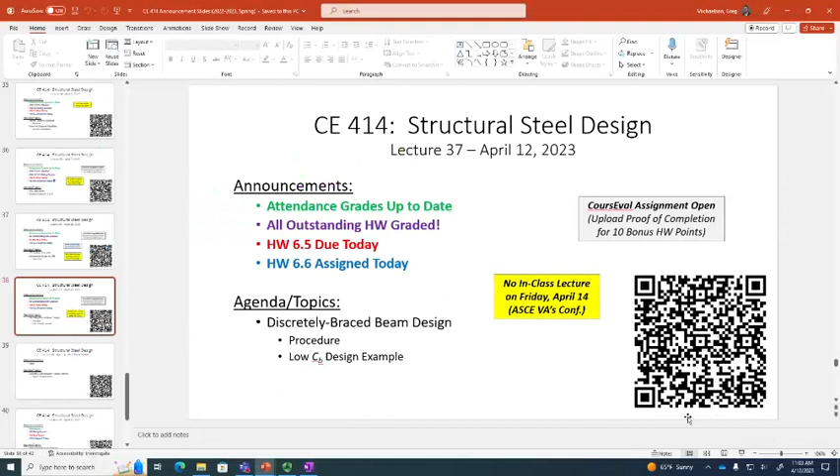So today, what we're going to do is discuss design of discretely braced beams. The process is generally the same, except for the step where you actually pick your trial shape. In the past, for continuously braced beams, our tool for selecting the shape was table 3.2. Now the tool is table 3.10. So it's the same process, just a different selection strategy. We're going to do an example problem today, and you'll see how it is remarkably similar to what we have done before, except for that stuff in the middle.

Now, our example today is what I'm calling a low CB value example, okay? So we have a low CB value example and we have a high CB value example. The difference between the two, those terms are my own terms, my adjectives for the examples. But what defines the difference will become clear as you get into the examples. Basically, high CB values cause you to iterate your selections a little more than with low CB values.

So let's make sure that we're clear on the equations for capacity. We have zone 1, zone 2, and zone 3. One thing I will tell you, and I think I mentioned this in the pre-recorded video, if you are given a beam and you need to analyze it, it could be either zone 1, zone 2, or zone 3. You really don't know until you go through the math and see. But I will tell you that in the land of design, when you as the engineer are responsible for selecting optimal economic shapes, you will most likely be in zone 2. That will most likely be where you land if you're in design mode of discretely braced beams.

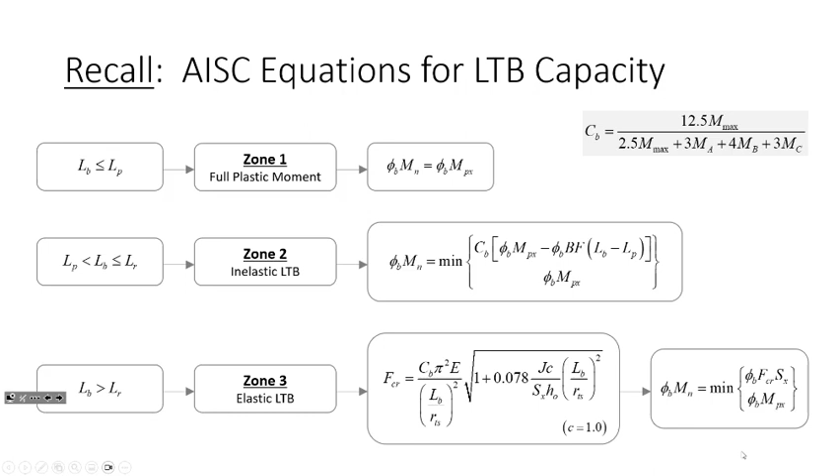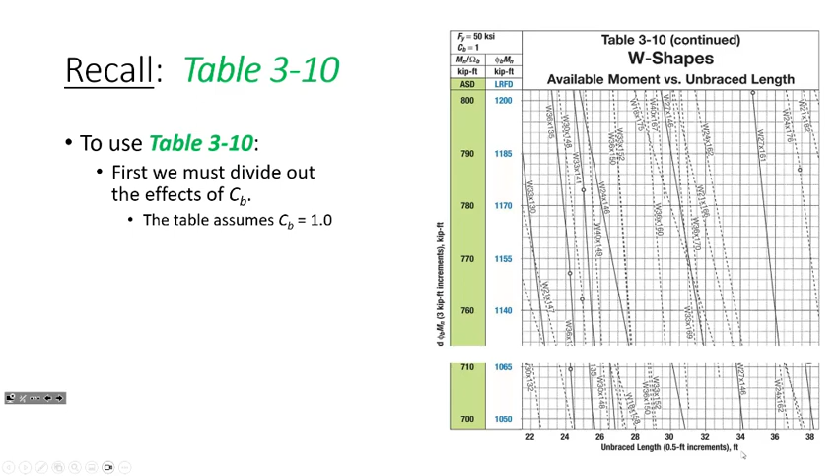Now let's make sure we're all comfortable with Table 310. I've got my animation slide to show you how this works. Whenever you're using Table 310, you take your factored moment and divide out the effects of Cb so that you're entering the table with an effective Cb value of 1, because that's where these charts are configured from. They assume a Cb value of 1. We then look for the point where the x-axis corresponds to whatever unbraced length we're considering, and the y-axis corresponds to whatever moment we need to design for, divided out by the effects of Cb.

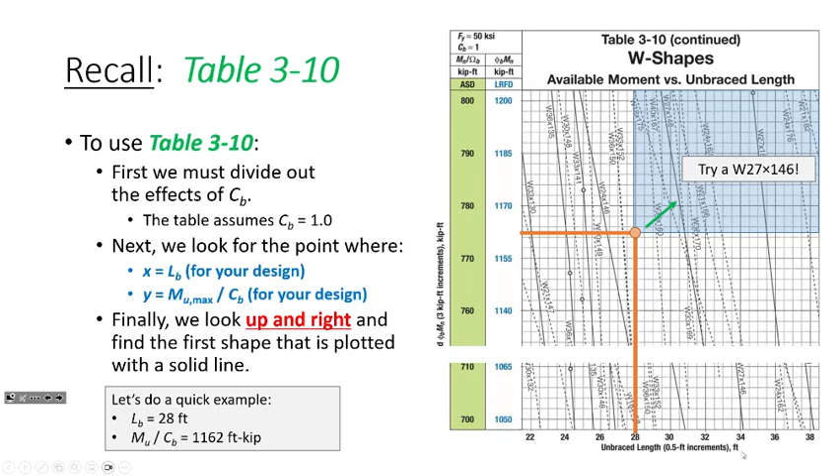We look up to the right and find the first solid shape. Last time we did a couple of examples. So we find a point, recognize that anything in the blue shaded region is a safe selection, and we draw up and to the right to find the first solid line segment we could deal with, or should consider—in which case that's a W27 by 146. So that's the process for selecting a shape.

Now I want to get into the design aspect. How do we actually design a discretely braced beam? Honestly, I don't think there's anything in these slides you couldn't come up with on your own based on what we already need to do for continuously braced beams.

Remember, we have 3 limit states that we need to assess. We need to ensure our selection has adequate moment capacity. We need to ensure it has adequate shear capacity. And we need to ensure it meets any associated deflection requirements. So it's the same story here, okay?

So what do we do? The first thing we need to do is compute a factored moment. But in our analysis step, we probably also ought to compute a Cb value—that's a little new. We didn't have to do that for continuously braced beams because we didn't care about Cb; that didn't really matter. Cb only affects the lateral torsional buckling capacity, and since in continuously braced beams we don't have to worry about that, no big deal. So in step 1, we're basically performing our structural analysis.

If we're not given a beam self-weight, we should assume one—somewhere between 50 to 100 pounds per foot is pretty common for most structural engineering applications. You'll get better at picking a value that makes sense the more you design beams. Usually, if you look at framing plans, floor framing plans, the beams frame into the girders.

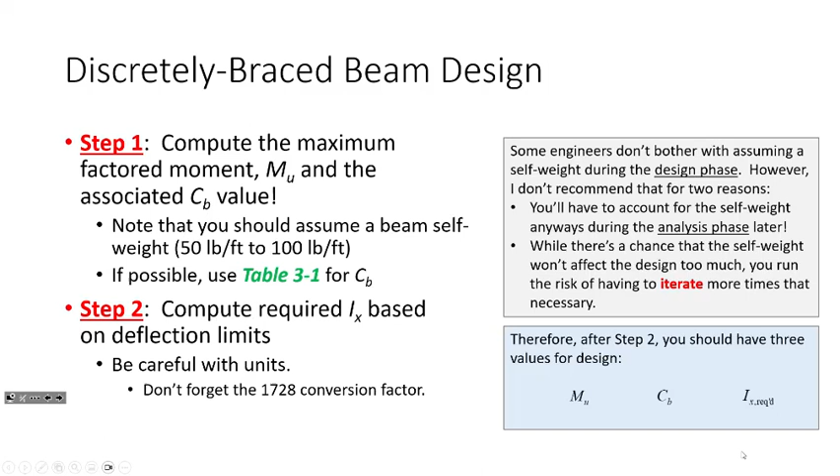Now what you do after that is you go into Table 310 with this on your x-axis and this on your y-axis, and you pick a section, okay?

Keep in mind that we can only use table 310 if Fy is 50 KSI, but again, that's not going to be a problem for most rolled shapes. I think in the last edition of the manual, you could actually download table 310 for Fy 65 KSI. I know there were some design aids you could download for 65 KSI, though I can't remember if table 310 was part of it. If you have your AISC account, which I believe everybody in here does to get your manual, there's a lot of really cool and really free resources on AISC that you should consider downloading.

Once you get a trial section, you should verify that the moment of inertia is good enough. If not, select based on 3.3.

Yes, sir. Do those resources go away when you graduate?

What I would say is probably... but what I don't know is how long your student account is active. I have an educator account, and I think I have to periodically verify that I'm still an educator. So if I left Marshall and went into private practice, I wouldn't be using my EDU email address. So what I'd suggest is go ahead and download all that stuff now. But if you're at a firm that does a lot of steel design, they'll probably pay for an AISC account, so it wouldn't matter anyway. I just think it's good to have a lot of this stuff.

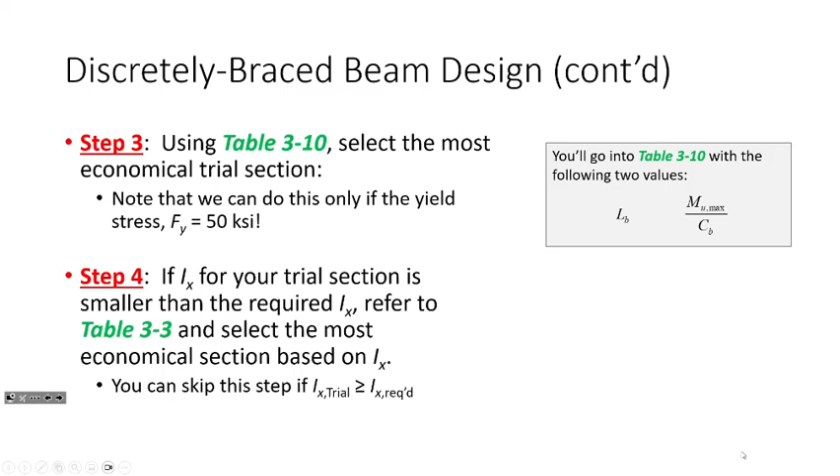Using table 310 assumes that the beam's design is going to be governed by its moment capacity. And if this isn't going to work, then all that isn't really going to influence your selection. Now, once you have a trial shape, you need to analyze it.

Unlike continuously braced beam design, analyzing the beam is highly, highly necessary. With continuously braced beams, as long as your self-weight was assumed correctly, with enough experience you can sort of see that this is a formality. But with discretely braced beams, I don't think this is a formality. I think this is incredibly, incredibly important.

What I'm saying about discretely braced beam design is that if you are designing a beam with a high CB value, in quotation marks, it can generate a false positive. You can select a section from table 310 that looks like it's going to work and it doesn't. So analyzing is incredibly important, okay?

Maybe we'll talk a little bit about that today if we have time. Make sure you check the shear capacity. Right now we're just looking it up. On Monday, we're going to discuss how to actually compute shear capacity, because this whole time we've been just relying and hoping that table 3.2 works, and I think you should be armed with at least a little bit of information to understand how to compute it. It's not hard, in most cases it's just the area of the web times 0.6 times Fy. But I want you to understand all of the aspects that can go into it.

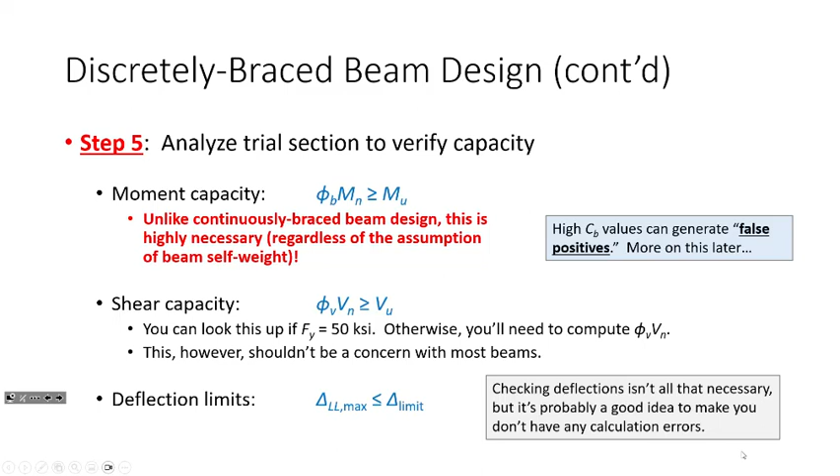And finally, making sure that you've got your deflection limits satisfied.

One final tip regarding table 310, this is just one of those Dr. Mike's tips and tricks. Sometimes when you're using table 310, the lines kind of get bunched up, and if you're trying to pick one, it might be kind of hard to see which one to pick. So I suggest sometimes that maybe what you ought to do is find that point and just trace upwards and find the first section that you intersect with.

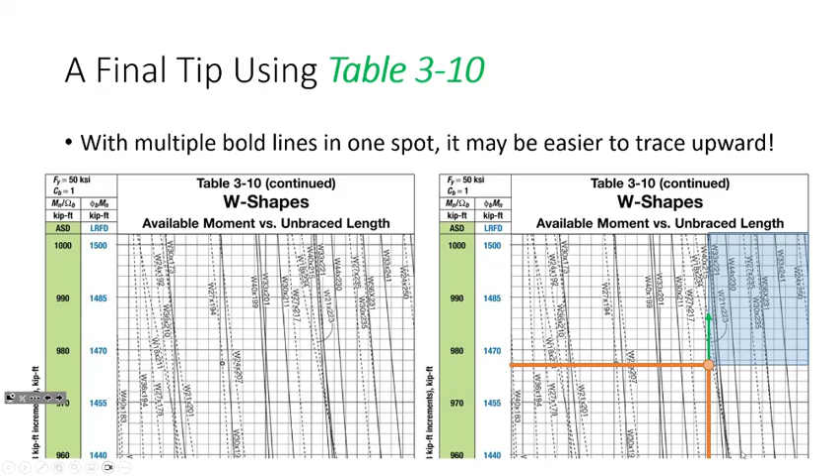Sometimes when you're tracing upwards you can't actually see the shape, and you need to turn to another chart to find the shape that works. That won't happen on the FE exam because they only give you one page, so the problems are designed so you'll find the section on that one chart. But in real-life steel design, you might need to go to the next page of Table 3-10 to find the shape that works, and sometimes when the lines get like this, tracing upward might be a little easier to see the shape. Make sense?

Let's do a problem. I've got a discretely braced beam that I want to go through with you all today. I think we'll have a little time to look at high Cb values in a bit to show you what happens there. We won't get into all the details, but maybe a bit. So let's design a discretely braced beam for the loading shown.

I have a dead load of 1 kip per foot and a live load of 3 kips per foot. The dead load shown does not include the beam self-weight. So from a terminology perspective, this dead load is superimposed, meaning that it is on top of the beam self-weight.

The beam is 24 feet long, and we're going to be designing this beam assuming it's discretely braced, specifically that it's only braced at the ends. We're going to design the beam for these loads and also to meet a live load deflection limit of L divided by 360. This is going to be the focus of our design today, and this is about as bread and butter a structural steel design problem as you could get in the real world—about as straightforward and real life as it could get.

So a 24 foot long beam. Imagine designing a beam in this building that's 24 feet long. There's the loads, pick a beam. That's pretty real world, okay.

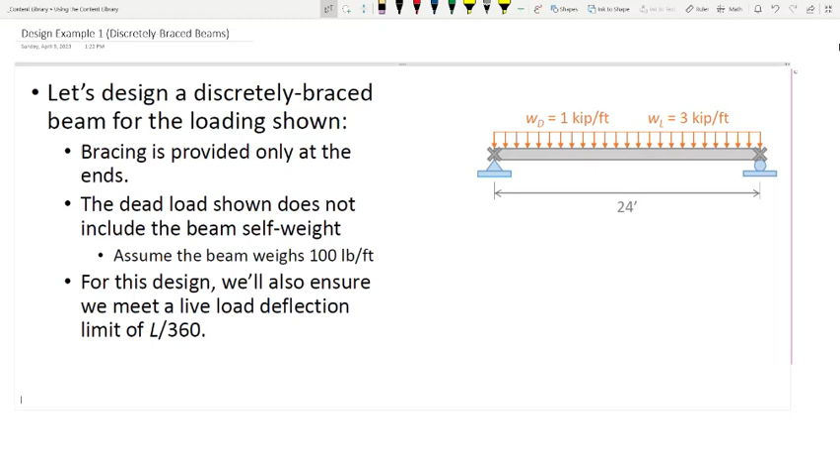So the first thing we're going to do is some structural analysis here. Step one: structural analysis. And while I'm working on this, do y'all need a few minutes, or do you want me to hold off? Tell me, am I good to go, or should I wait?

Okay, so what we've got here is a beam. Let's identify some aspects of this beam—let's make sure everybody's paying attention. The beam is 24 feet long. What is Lb for this beam? It's 24 feet. So in this case, the span length and the unbraced length are the same, okay? Just make sure you're not always saying that. If there's a brace at mid-span, then Lb would be 12 feet, not 24 feet. So make sure you're not always saying that L equals Lb.

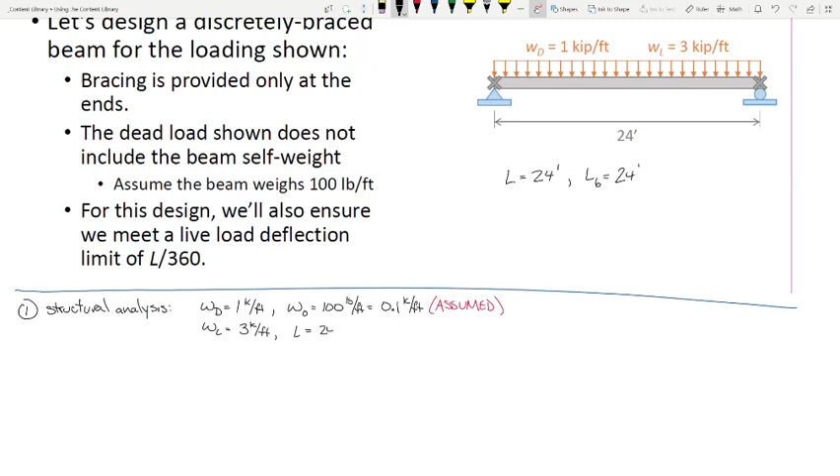Now, we were given a dead load of 1 kip per foot, and we were given an assumed self-weight of 100 pounds per foot, or 0.1 kip per foot. I'll make a note that that's assumed. We have a live load of 3 kips per foot and the length is 24 feet. So we've got a couple values that we can go ahead and start computing. We'll start off with—here's how I'll handle this—I'll do the moment over here.

So the dead load moment—hopefully this should be pretty familiar at this point. If not, if there's anything you're having a hard time following, let me know. This is going to be the dead load plus self weight times L squared over 8. WL squared over 8 works because the beam is simply supported and the load is uniformly distributed. If we had a cantilever beam or point loads, this would not work—we'd have to use another method or draw the shear and moment diagrams.

So I'm going to write this as 1.1 kips per foot, times 24 feet squared over 8. What do we get for that? 79.2 foot kips. Do I have a second?

Okay, and we'll go ahead and do the live load. The live load is WL squared over 8, same calculation, just different load. I know this isn't the most efficient way of doing this, since we could just factor the load and do WL squared over 8 once. But I want you to get into this habit in case the live load moment isn't uniformly distributed, in case it's a point load or something else. So what do we get for this? 216.

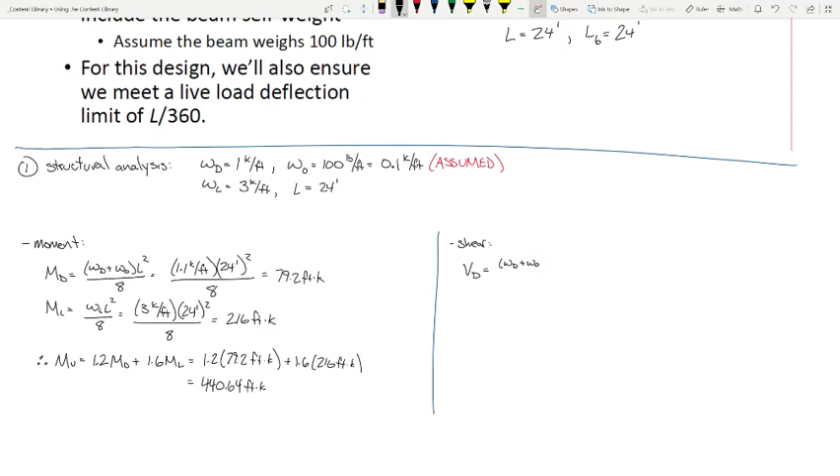Okay, so just to make sure everybody's awake this Wednesday morning—if my formula for moment is WL squared over 8, what's my formula for shear going to be? WL over 2, there we go. So for shear—again, if this part is boring or routine, that's good, that means you're getting familiar with this. Just make sure you adjust if your loading conditions change.

And then for live load, I think I could do this in my head because 24 over 2 is 12, times 3 is 36 kips. What about the dead load? I'm probably not that good—I might need some help on that one. I got 13.2. Do I have a second?

Okay, good. So finally, VU—again, 1.2 V dead plus 1.6 V live—1.2 times 13.2 kips plus 1.6 times 36 kips. What do we get for that? 60.24. Say it again? 60.24. Do I have a second?

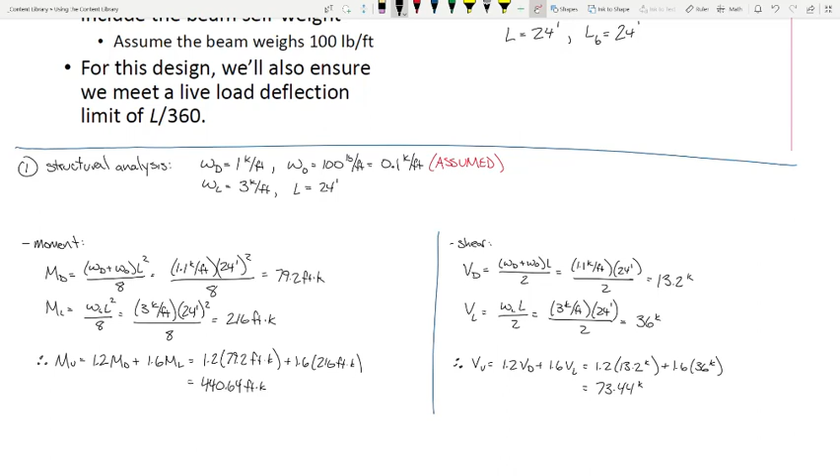I got something different, I got 73.44. Was it 1.32 maybe, like if the decimals are there? Did that do it? I multiplied the dead load by 0.2. Ah, that'll do it—it's usually something small, no biggie.

Now, before we leave this step—this step is primarily the strength limit state structural analysis—I want to leave it with three quantities: the factored moment, the factored shear, but something else we didn't need before. Say it again? CB. CB, we need our CB quantity. Now the cool thing about this problem is... moment gradient modifier.

So the cool thing about this problem is we're dealing with a situation like this: a simply supported beam with a distributed load, and we know we're provided with braces at the ends. That's our situation. The cool thing is the CB value—you can actually derive this—is independent of the span length or the load. So all you have to do is look up our CB value, and more often than not we're going to try to employ that tool when we can.

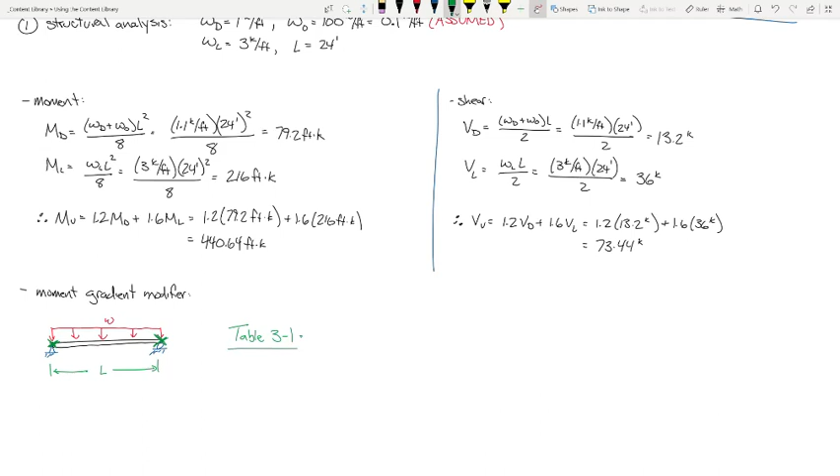So if you remember, we can go to Table 3-1 and look up our CB values. What is CB for this scenario? 1.14. And if you remember, I said this would be a low CB value—this is what I mean. Low CB values are like 1.1, 1.2; high CB values are things like 1.7 or 2. By the way, if your CB value gets over like 2.6 or 2.7, there are a couple instances where that might happen, but you might want to check your math—that's really high. So we're leaving this step with our CB value, our MU of 440.64 foot kips, and our VU of 73.44 kips. That's what we left this step with.

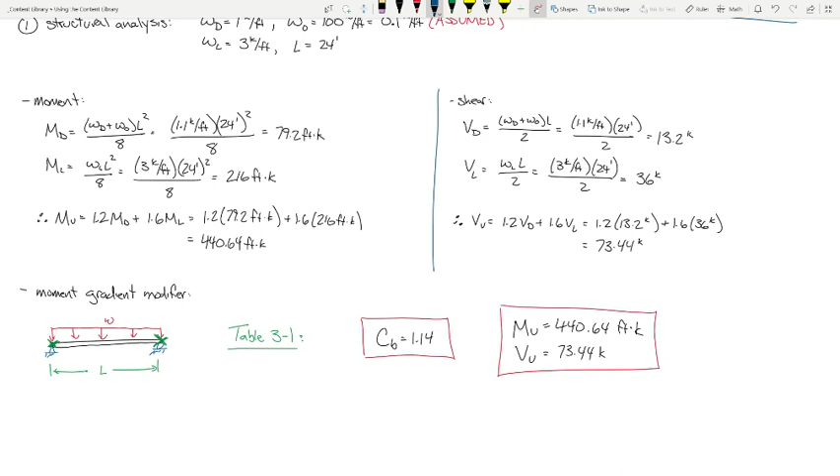And so if you want another name for this step, that is the strength limit state, okay? So now what we need to do is we need to assess our service limit state.

And we need to compute required IX. One thing I'll say about this is that it is possible on a homework or an exam that I might give you a problem and say there is no deflection limit. And so this could be a step that you just skip and just don't worry about checking deflections, don't worry about selecting a shape based on moments of inertia. So that's sort of why I separate this into its own situation.

So we need to compute our limiting deflection, which for this problem was L over 360. That's a really common deflection limit for floor elements in buildings. So we have 24 feet over 360, but we like dealing with deflections in inches. So when I take 24 times 12 over 360, you get 0.8.

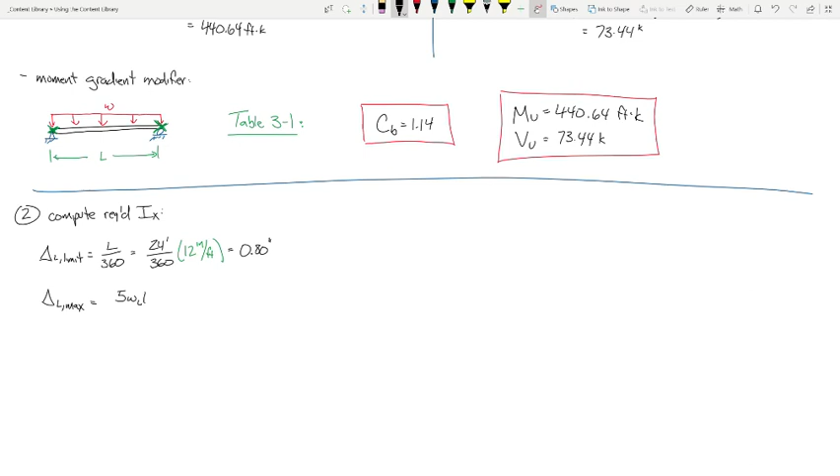And then for our deflection, to actually compute the deflection, the live load maximum deflection, it is 5WL to the fourth over 384 EI. So all I'm doing to actually compute the required moment of inertia is I'm just swapping these two - swapping the moment of inertia over here and the deflection over here and plugging in this for the deflection. So it's actually a pretty straightforward calculation.

I would say that IX required equals that. So again, all we're doing is just a switcheroo and plugging and chugging. So a big fraction.

Am I forgetting something? 1728. There you go. And so now we're leaving this step with a new design parameter, which is - the L is supposed to be to the fourth, right? Oh yep, that's right. 0.1 on the mistake count for that. But again, I'm allowed up to 7 mistakes per semester, but I'm the one who's keeping track of it, so it's a corrupt system, I know.

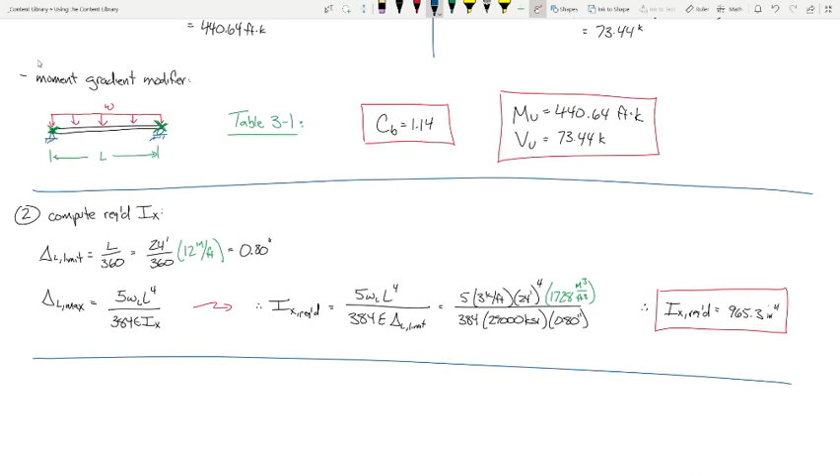Okay, all right. So now we get into what I would call the really new stuff with discretely braced beams. And that is to select a trial shape. So step 3, we're going to select a trial shape. And in order to do that,

we're using table 310. Now remind me, okay, so whenever you're going into table 310, you go in on the x-axis with what? LB, okay? So what is your LB for this problem again? 24 feet. Now on the y-axis, what do we go in on?

No. MU, what do we do to MU? We divide out the effects of CB. So on the y-axis, we go in with MU over CB. And I'll call it MU max over CB, just to match what's in the notes. And there's a reason why I format it that way.

440.64 foot kips divided by the CB value of 1.14. Okay, and so what does that equal? 386.5. And that's probably right.

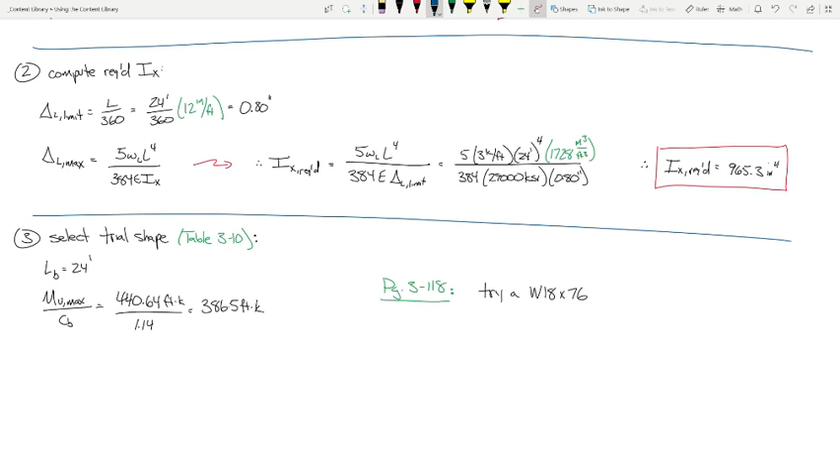Everything else I think you're going to find is very similar. So first off, the next thing we're going to do is just check the moment of inertia requirements.

So IX required was again 965.3 inches to the fourth. What is IX for a W18 by 76? What is that? 1330 - okay. So what does that mean? Somebody help me out, what does that mean?

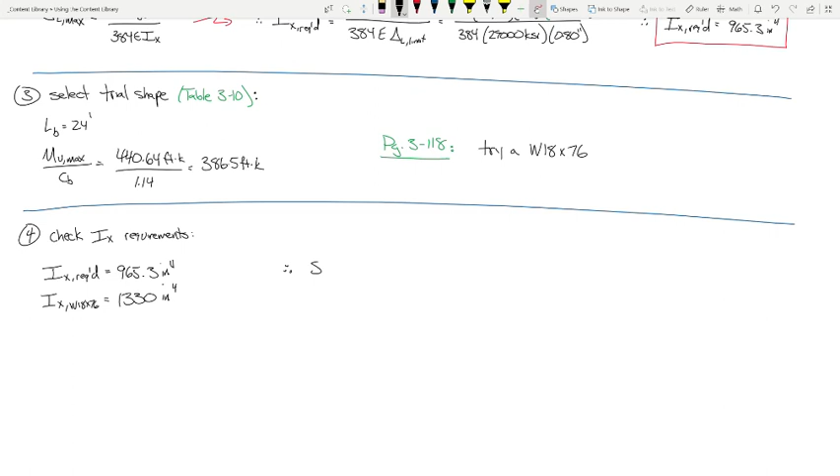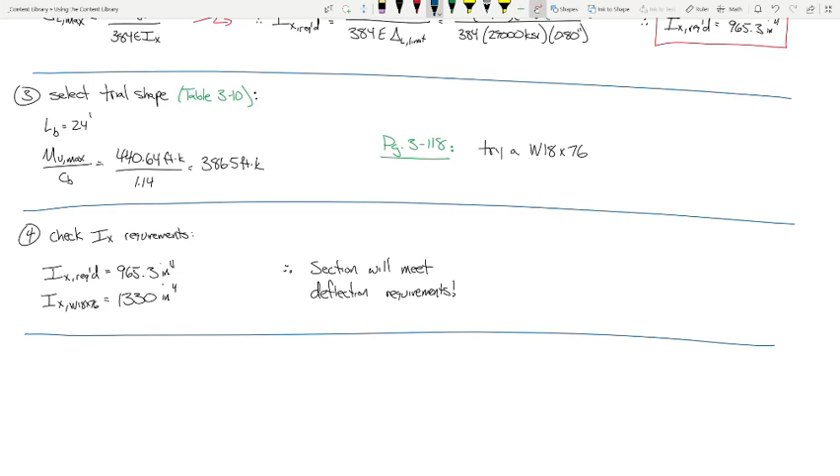Means we're good - this design is not going to be governed by deflections. It's going to be governed by either moment or shear, most likely moment, because shear never really governs designs all that much in building design. So I'll say, therefore, section will meet the deflection requirements. From here on out, this is going to be really simple, or really straightforward I'd say.

Let's analyze the W18/76 and verify its capacity. Now, can somebody make a comment about the beam's self-weight? Less - less than what? What we had assumed. Okay, so let's elaborate on that.

So we assumed in the design phase a self-weight of 100 pounds per foot. The beam has an actual weight of 76 pounds per foot, so it's lighter than what we assumed. So I'd argue that if this section has adequate moment capacity based on the MU we already computed, we don't need to update that MU - we can just go with it. Does that make sense? We don't need to update our loads. Now, we would need to update the loads if the beam was heavier - say we picked a W36 by 150 or something.

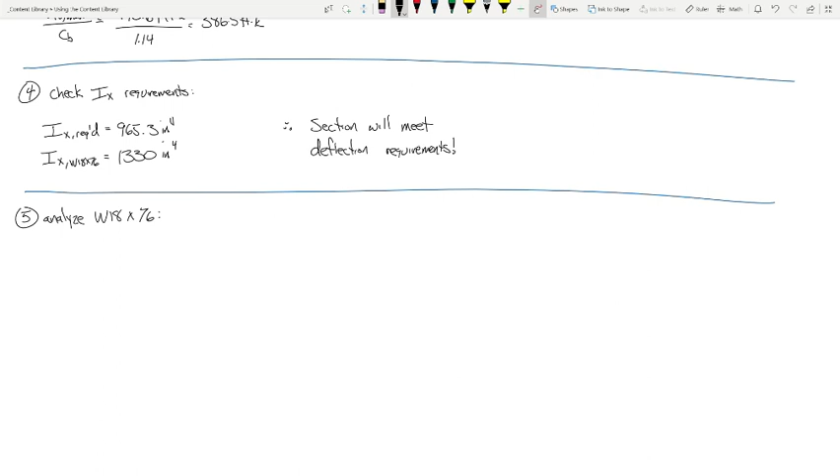So, okay, all right, let's analyze the 18/76. Now, if this is a discretely braced beam, you tell me, how do we analyze it? Let me guide this a little bit. How do we determine the capacity of a discretely braced beam? We use this, right? So help me out - if this is our means of computing capacity, how do I compute the capacity of a W18/76? What do I do? I need to find LP and LR - I need to figure out what zone I'm in. So what is LP and LR for a W18/76?

Let's look that up. So what is LP and LR?

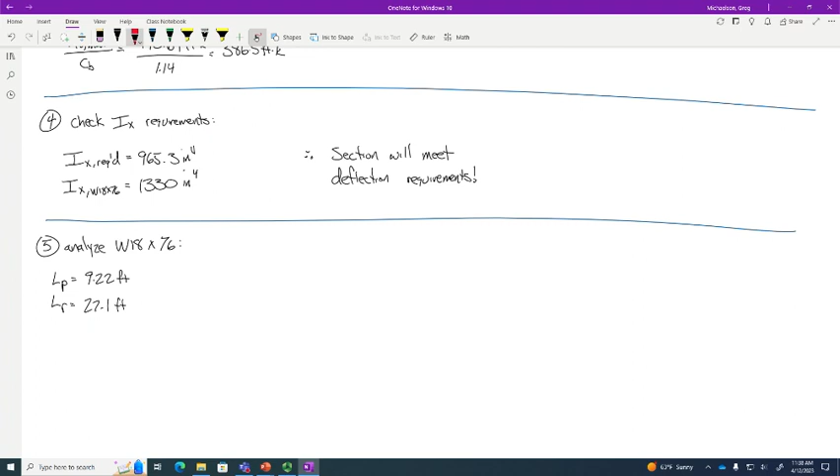So LP is 9.22, LR is 27.1. And somebody remind me, what was LB? 24. So what does that mean? Zone 2. And again, for most discretely braced beam designs, you will be in zone 2. Most of them you will be, okay? So if you're not in zone 2, check your math. I'm not saying it's wrong, I'm just saying check your math.

So in order to compute the capacity according to zone 2, here's our flow chart. Remember that's the linear region, we're going to need a few things. We need CB. Do we already have CB? Got that, that's 1.14. We need phi Mpx, we need BF, we got LB, we got LP, we've got that. So we need three terms: CB, and those two. So let's see what we got here.

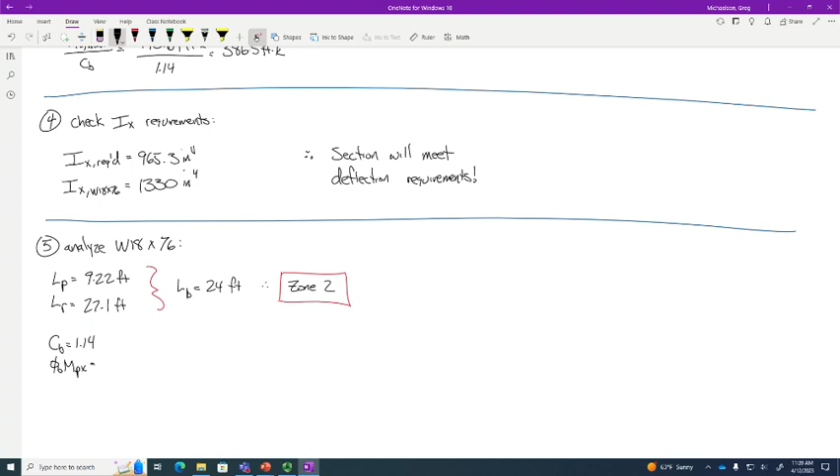CB is 1.14. What is phi Mp for the W18x76? 611. We have BF, that's the slope of that line in the linear range, the beam factor. What is that? 12.8. And while we're at it, while we don't need it for the LTB capacity, let's look up phi Vn. What is phi Vn for this shape? 232.

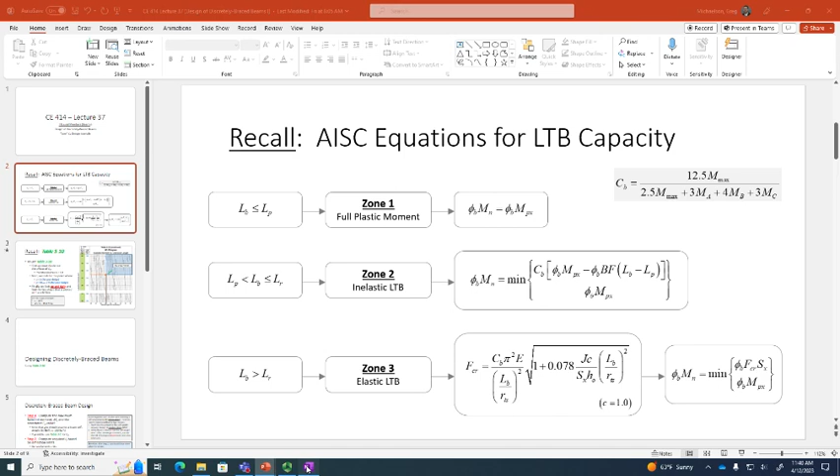All right, so therefore, going off my flow chart, phi Mn, the capacity, is the minimum of these two quantities. So I'm going to compute this one up here. I've got CB times phi Mp minus BF times LB minus LP, and that equals 1.14 times 611 minus 12.8 times LB, which is 24 feet, minus 9.22. Let me clear that up a little bit. So that's 611. So what do we get for that?

I got 480.87. 480.87. Do I have a second?

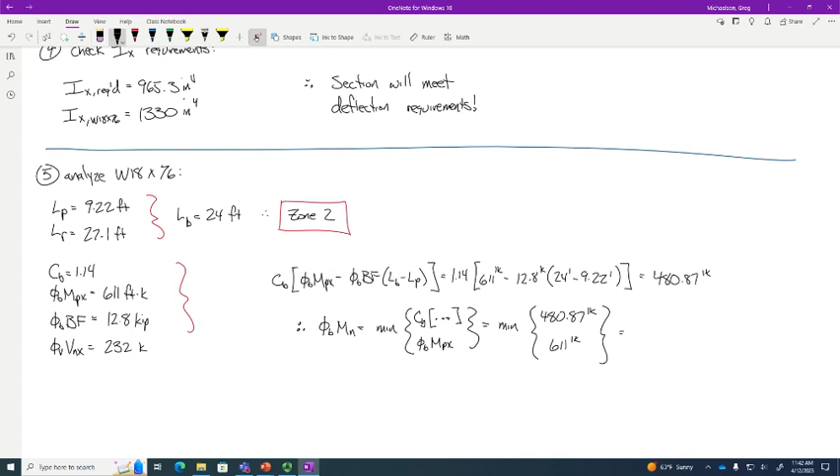So the minimum of those two is pretty obvious, 480.87. So, to be clear, what we're doing is saying phi Mn is 480.87 foot-kips, and we are comparing that with Mu. Mu is, what was Mu? Not Mu over CB, Mu. 440.64. So that Mu over CB was just so we could use the design aid, but that's not the actual moment on the beam. The actual moment on the beam, appropriately factored, is 440.64 foot-kips. So, therefore, we are okay. And if you want, you can compute a performance ratio for moment, and I'll go ahead and do that for you: 0.916, or 91.6%. So that's not bad.

And while we're at it, we could go ahead and say that phi Vn is 232 kips, and our Vu, what was Vu? I think it was like 73.4. And that's obviously okay. And we can get a performance ratio for shear, and again it's really tiny, 0.317.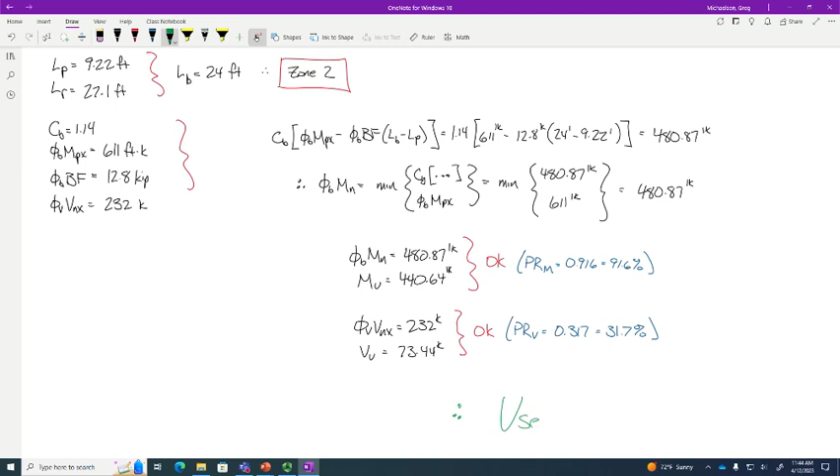We know that the deflections are not going to govern, so I'm going to go ahead and just forego the formal deflection check right now because I kind of want to introduce the next lecture. But I think we all know what the answer is. That's the answer. The answer is that design works.

Does anybody have any questions? Hopefully this is pretty routine. I think what I have found in steel design is that this stuff is not very difficult, but it's coming near the end of the semester. Everybody's like, Dr. Mike, we're ready for summer.

Am I off? Am I... No. Off? No, you're right. Nah, you're right. You nailed it.

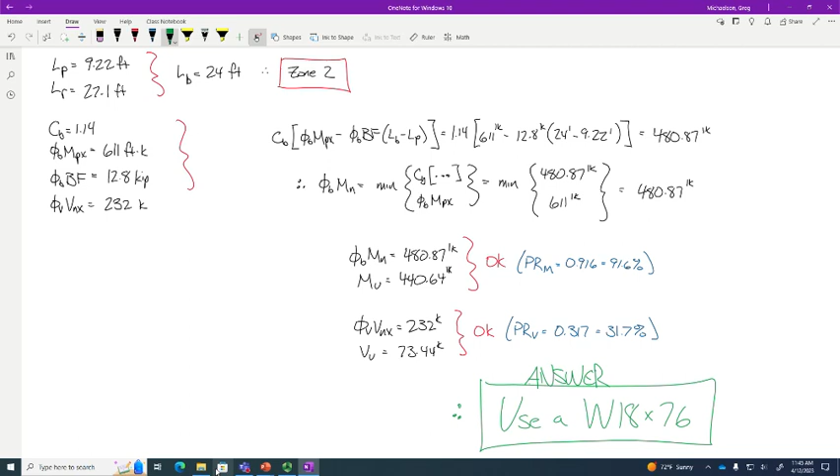Now, I know. Now I want to at least show you this false positive thing. I talk about it in more detail in the lecture, but I just want to show you the issue, okay? Does everybody have this? All right, let me at least kind of set the stage for this next lecture.

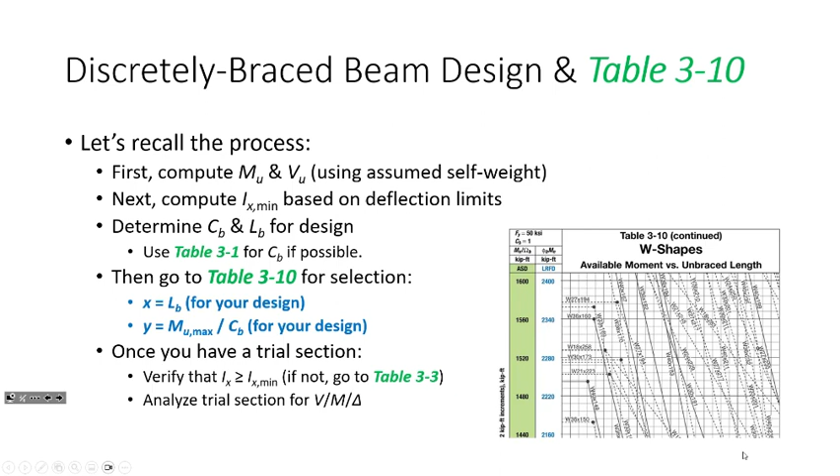And so, like I said, I'm going to skip a lot of this stuff here. But in general, the way discretely-braced beam design works, you go into this table with LB and an Mu over CB to select a section, analyze it for shear, moment, deflections. There you go. Okay, I'll talk about this in the video next time. But I kind of want to talk about false positives and this thing with high CB values.

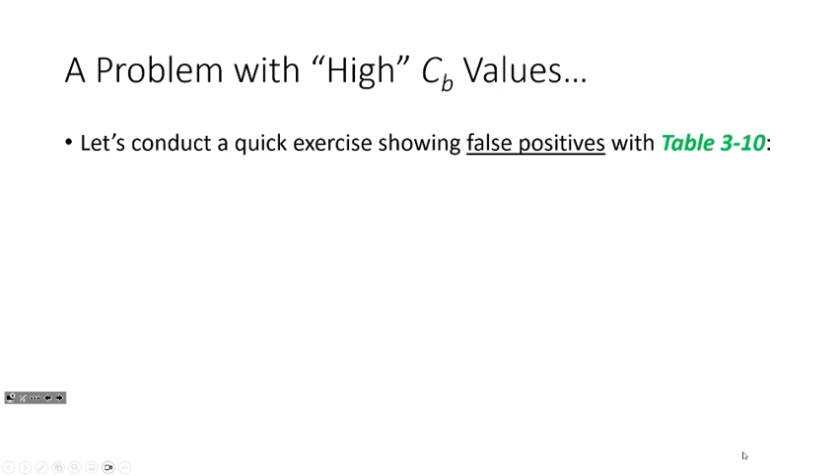So real quick, I know we're getting short on time, but I want you to follow along with me. I want to conduct an exercise with you. I want to pick a section, I just want to go into table 3-10. I want you to help me out. I want you to pick a section for the following data. So let me show you what I got here. I've got some random Mu max, a moment of inertia, CB, and I've got LB as 20 feet. So what do you go into table 3-10 with? You go in with 20 feet on the x-axis, and you go in with 510 on the y-axis. Somebody help me out, what section is that?

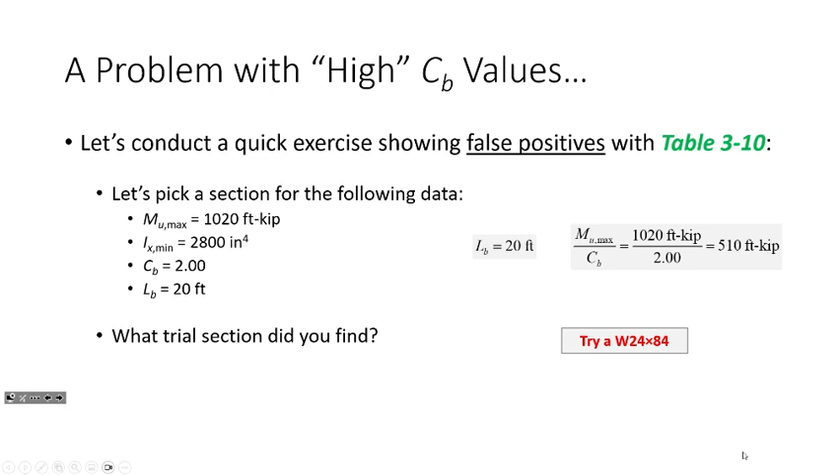Say it again. W24×84, see that's the one I got. Does everybody else see that? Okay, now I got another question about the W24×84. So let's say that's your section. Can somebody tell me what phi b Mpx is for that section?

840. Does everybody else see that? All right, now I'm going to stop for a second. I want everybody to look at the slide. Take a look up here. Does anybody see a problem with this data?

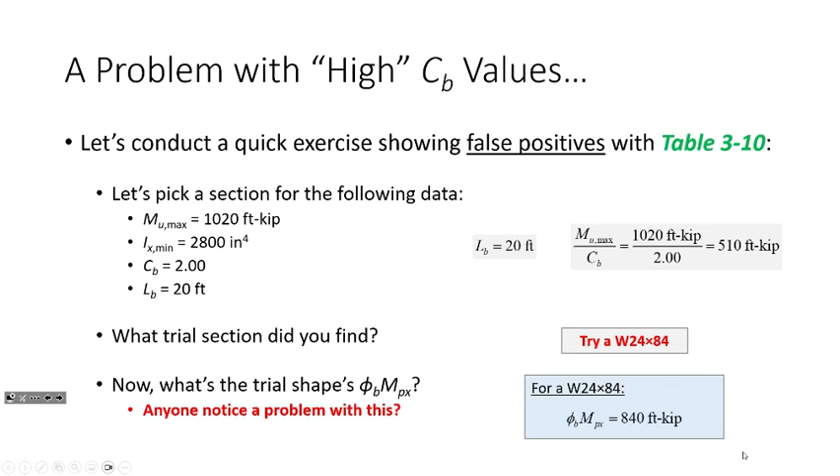Exactly, that's exactly right. Okay, take a look at this. All right, so here's the problem. The maximum MU for that problem was 1020 foot kips, but the maximum possible phi b Mn is 840. Remember, the plastic moment, that is the largest capacity that you can get out of a steel beam, or that you can count on for design purposes, right?

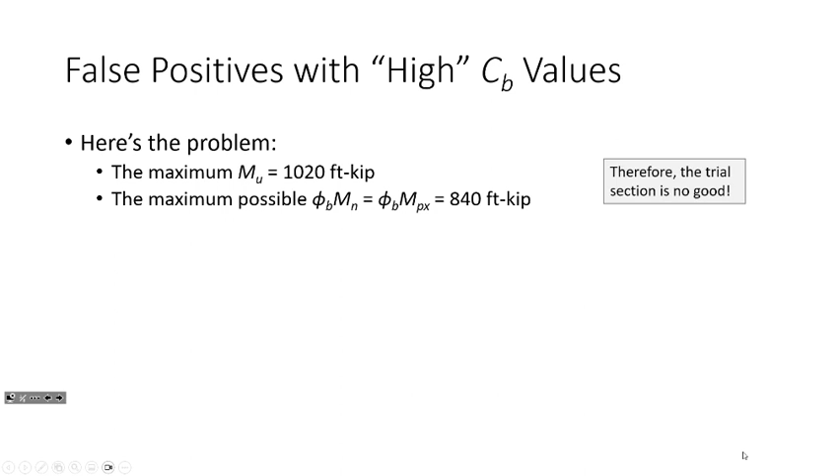Period. So what happened is we went in the table with MU over CB, but we had a really high CB value. We had a CB value of 2, okay? So the trial section that we picked out of that table was no good, okay?

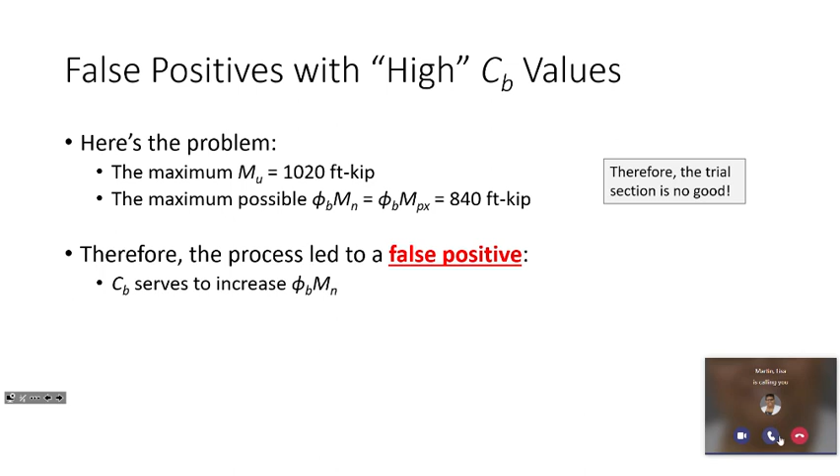So that led to a false positive. I'll call you back. So CB serves to increase... so this led to a false positive.

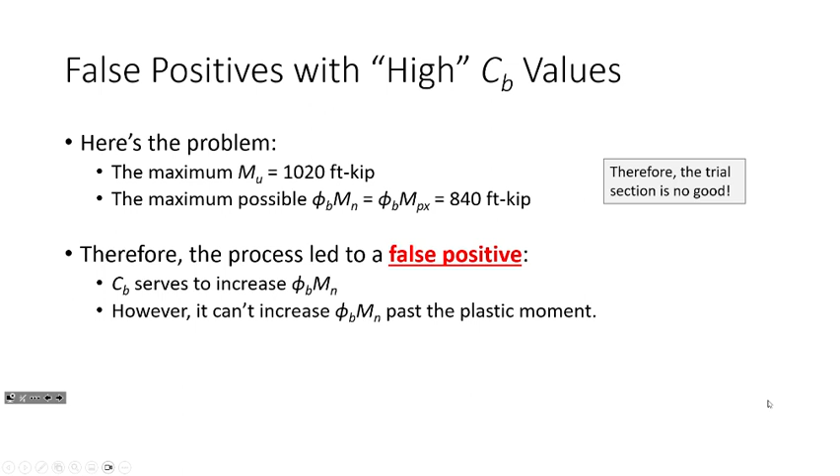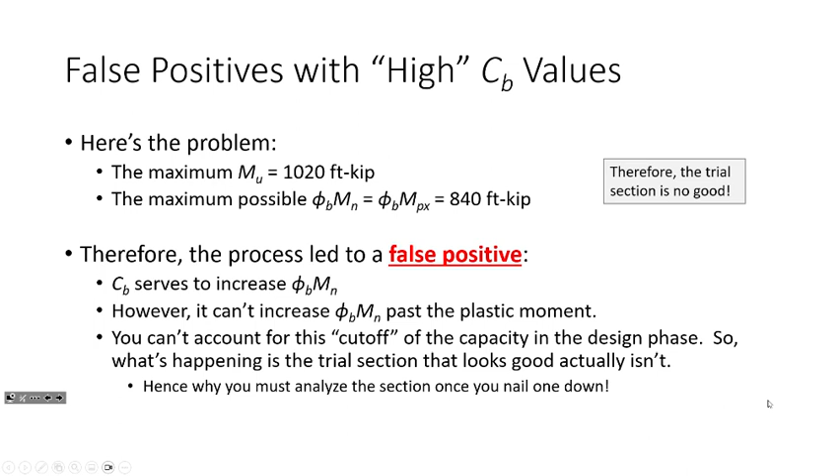The moment gradient modifier serves to increase phi b Mn, but it doesn't increase phi b Mn past the plastic moment. But the problem is when you go into Table 3-10, you can't account for that cutoff. It doesn't really work. So you're going into phi b Mn, or into Table 3-10, with this reduced moment that may not reflect what's actually going on. And so the way that you have to handle that is you have to iterate.

Now, what you end up doing is this. So if you go into Table 3-10 and you end up picking this shape, because this is the one you all just did a second ago, right? This is the W24×84. So how does it work? Watch this. You just pick the next one, and just keep picking the next solid section until you find one that works.

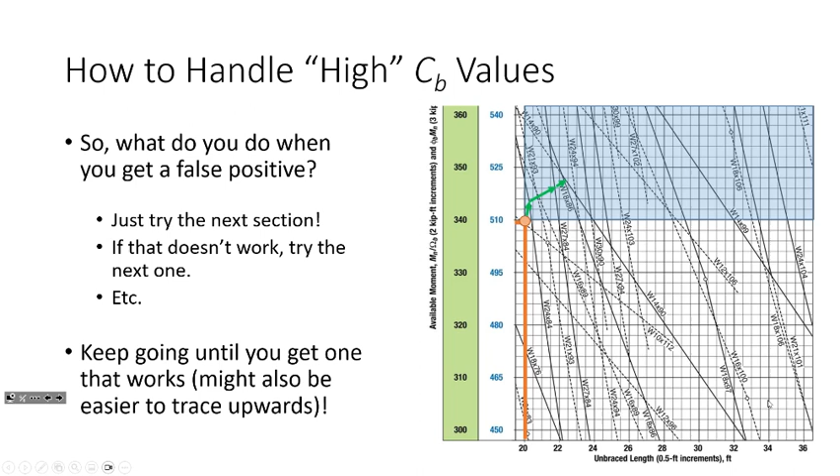And so what you end up doing, if you have a larger CB value, is you just set up a table. Like here's MU, here's the phi b Mpx. It's no good, it's not going to be any good. There's no point in doing the math. So if you wanted to check the moment of inertia, you could, but who cares? Because this section doesn't work, right?

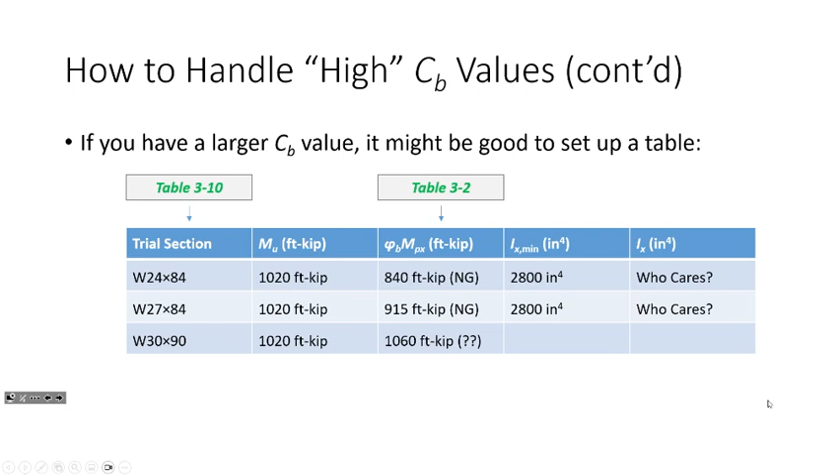So then what you would do is you'd go to the next solid section. Look up its phi b Mpx, it doesn't work. Go to the next section. Look at its phi b Mpx. Oh okay, now we have a section where phi b Mpx is larger than the applied moment. So this is a section that's at least worth checking. This is the point where I would actually take a look at the moment of inertia.

Now again, we still don't know if the W30×90 is going to work, but it's at least a worthy section to check and see. Then what we would do is check the moment of inertia, and now we see, okay, the moment of inertia is worth picking. And if we found that this was no good, we would just abandon all that whole chart and just go to Table 3-3.

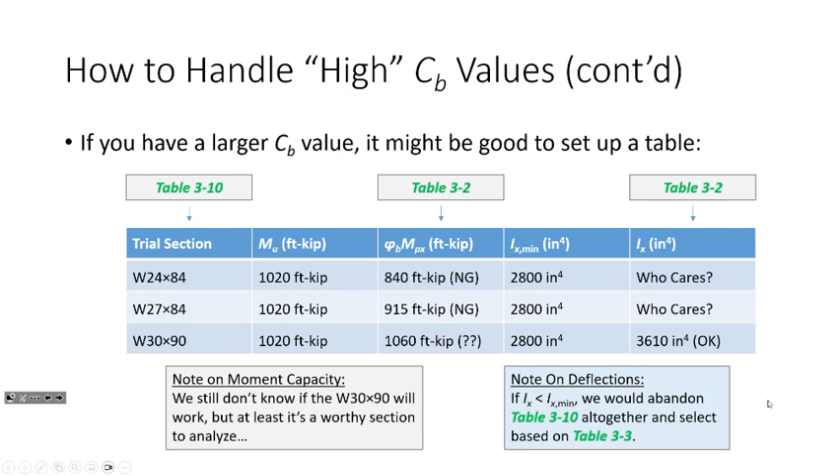So what I have is I have an example where I go through a high CB value problem, and we go through this process. We have to actually iterate it quite a few times. So the other thing I'll say when you watch the slides is that be prepared for some back and forth, because you're going to have to turn to Table 3-10, turn to Table 3-2, turn to Table 3-10, turn to Table 3-2. You have to do that a lot. I can't really get around that, it sort of is what it is.